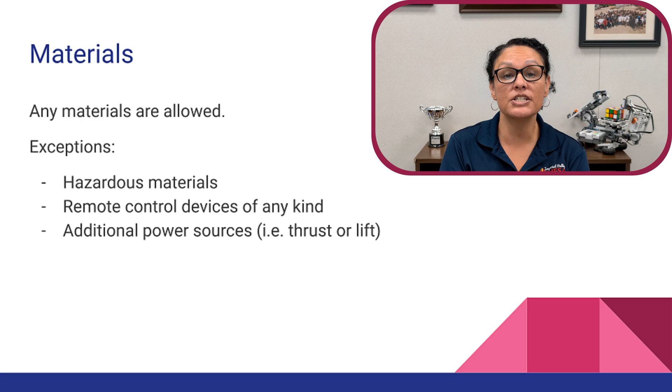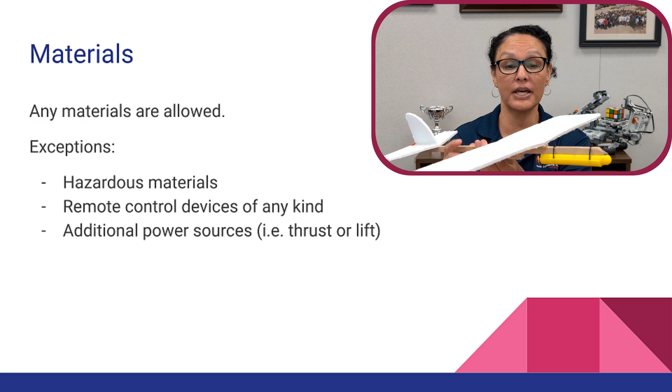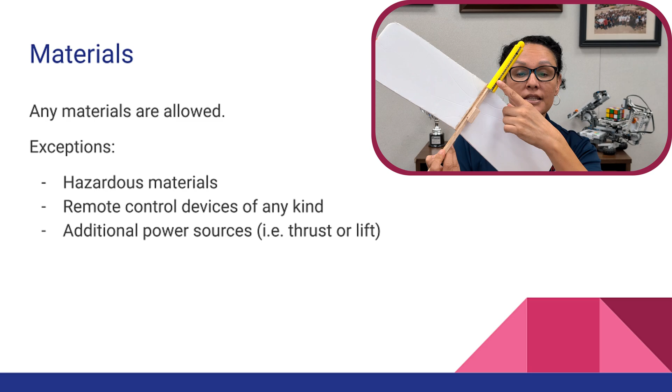As you will see in some of our videos that we will demonstrate, I'm going to show you some gliders that we have made here in office. As you can tell, this is balsa wood. We're also using poster board for the wings. In addition to that, you will see this glider specifically in the video. This yellow addition here was 3D printed to hold the hex nuts.

So do you have to use this? No, but it's a nice way for your students, especially those who have access to a 3D printer, to practice their design skills online and incorporate it into their gliders.

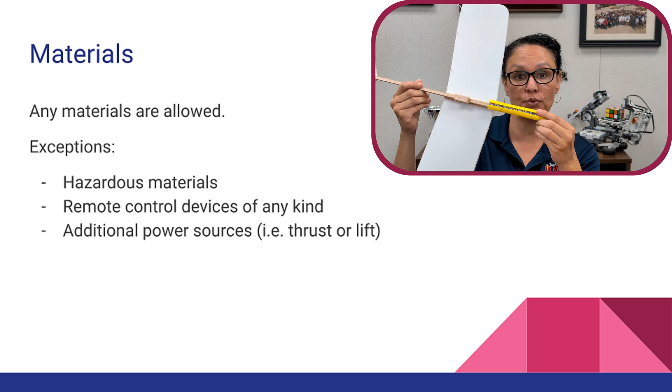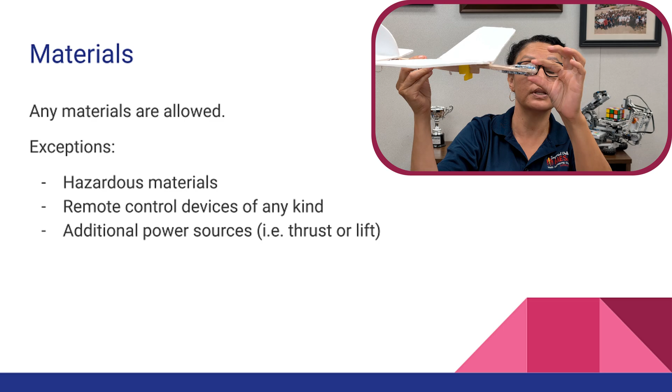We also have another glider here made out of balsa wood and poster board. This one, the hex nuts are attached by tape only.

Okay, for the obstacle, we did not change anything from previous years. It's the same distance, it's the same PVC pipe with the nylon string. And again, the glider must fly over the 5-foot obstacle and must stay within the 10-foot width of the obstacle as it's flying over it. So that remains the same as previous years.

The one thing we did change, a little tiny bit, but for the better always, is the launcher. As I have mentioned in prior trainings, we really listen to the feedback that we get from teachers, from staff, from students. And one of the things that they really touched on was that the launcher had no inclination.

So within our office, we have a real life STEM god, as we call him. His name is Minero, and he's always right behind me. Do you want to come say hi? Come say hi. Everybody has heard the name. Here's the man, the myth, and the legend, Minero.

He created this little, very simple attachment. It basically, as you can tell in the pictures, it just sits, it goes right into the bottom of the legs of the front of the table, and it gives it a 5-degree inclination. It is deep enough to where you don't have to add anything else. It literally, you put it on, it gives it an inclination, and this gives the launcher stability.

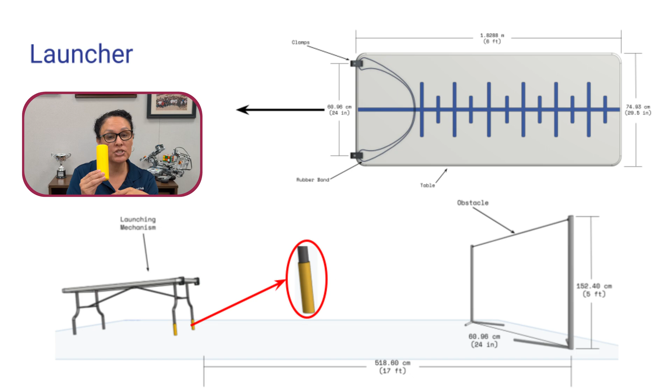This is available, and the link to print these is in the rules. We also know not everybody has a 3D printer, so you can email us - you'll have our information at the end of this presentation - and we can print a few of these out and send them to the school sites if you don't have a 3D printer within reach. This is required for this year's competition, so please make sure you have this at your competition.

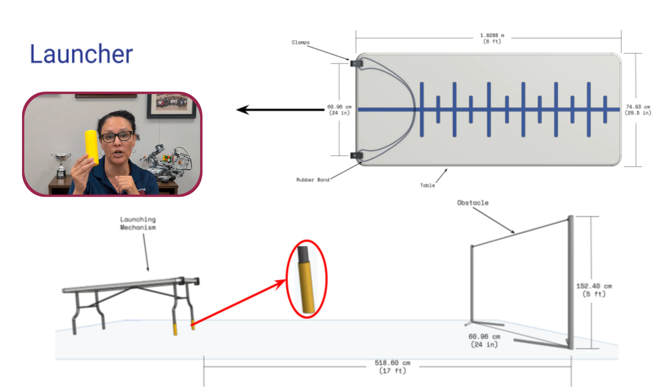Okay, moving on to the payload. As I touched on earlier, 6th, 7th, and 8th grade have a minimum of 2 hex nuts. The very specific kind we are purchasing has its link on the rules. We are asking that you purchase them from Home Depot. The sizes are listed there, and also on the link in the rules. We want everybody to purchase this exact hex nut so that it's standard throughout the state of California, and everybody is using the same hex nuts for the same weight and size. So minimum of 2 hex nuts for middle school, and minimum of 10 hex nuts for high school.

Each additional hex nut adds distance to your flight distance.

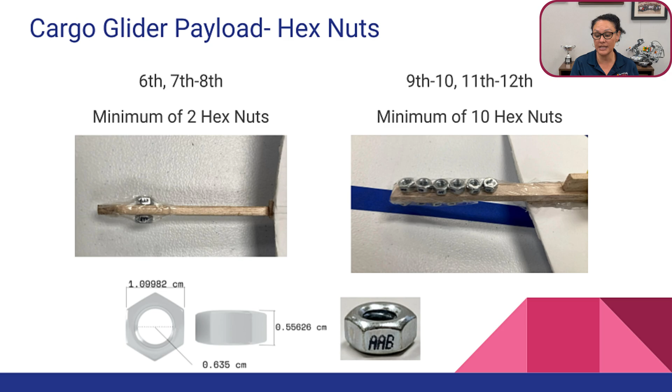In terms of how you attach them, I touched on creating something that holds them. Here you can see a simple picture with 2 hex nuts taped, and on the other side 10 hex nuts that are also taped. You can glue them on - almost anything is okay as long as we can see the AAB marking. When you check it in for Mesa Day inspection, we have to be able to see this marking to confirm it's the correct size, but otherwise any type of attachment is fine. As I showed earlier, this attachment made here in the office has an opening, and we can still see all the markings on those hex nuts.

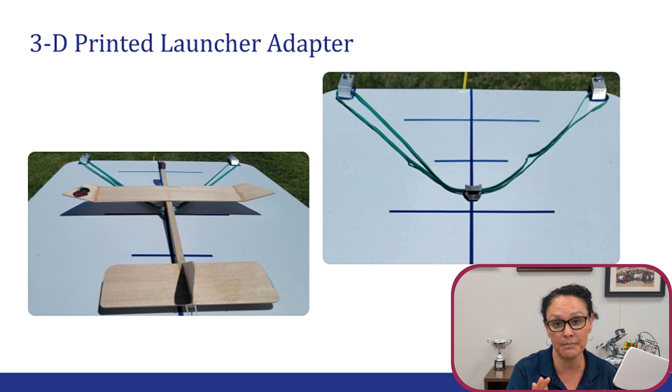We are continuing with the 3D printed launcher adapter. It is optional - you do not have to use it. If your student chooses not to use the 3D printed adapter, that's okay, it will still be available to you at Mesa Day. In our findings, when we practice with them, it just gives the glider a smoother launch and is easier to hook onto, but again it's not mandatory. Regardless, there needs to be something carved in or 3D printed on your glider that will hook onto either the rubber band or this 3D printed adapter.

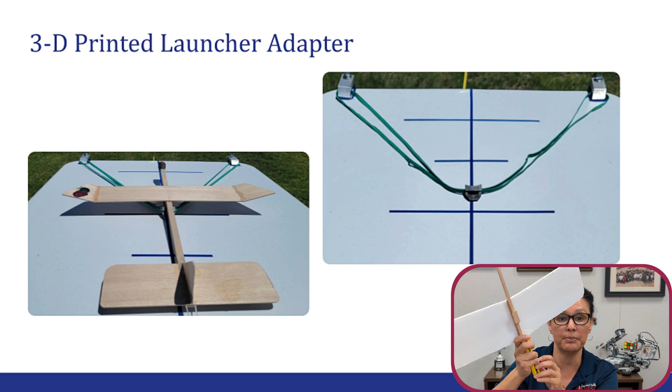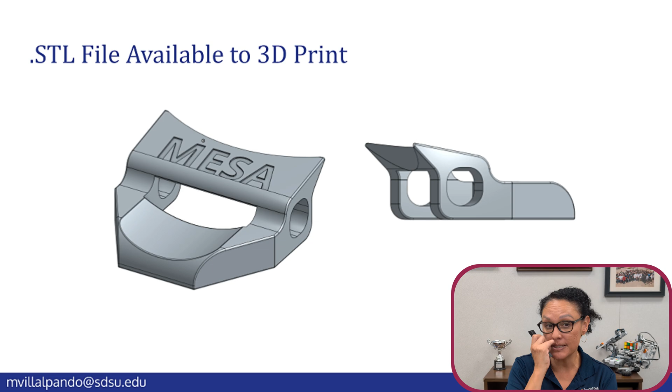This is the file, and it's in the rules for those of you who want your student to launch with this. The 3D print file is in the rules for the launcher adapter.

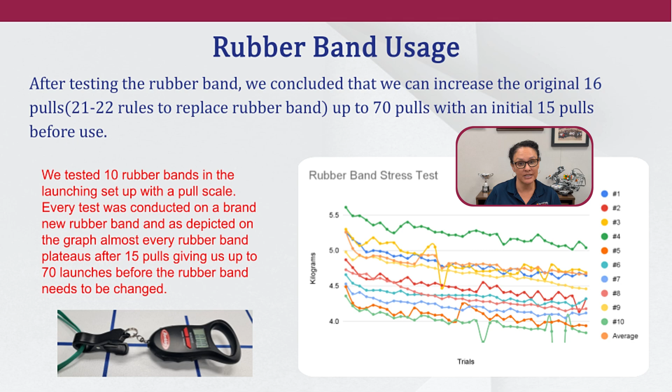We are using the same rubber band as in the past 3 years. It's very important that if you're using a brand new rubber band, you prime it first. That simply means pulling it a total of about 15 pulls, so that after the 15th pull, almost up to your 70th launch, there's a consistent launch because you've primed it to be ready.

Now, with all of that information, we are going to watch this year's new objective video. It will show you everything from launching to the setup for the launcher and the obstacle. It's just a few minutes long, so please enjoy, and we will be right back.

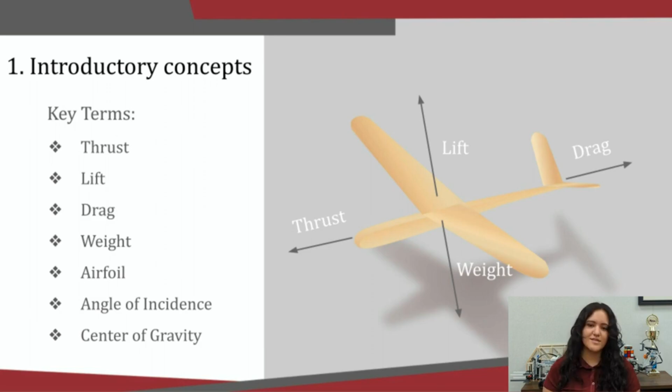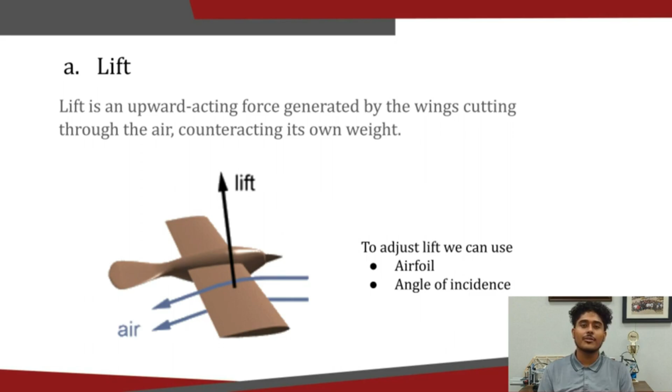Today we'll go over some few concepts and tips that will hopefully help you out with this competition. To build a glider, we first need to understand how it balances itself in the air. Some of the forces it's going to experience are thrust, drag, lift, and weight. These forces are shown in the image below. The most important force is lift, because it counteracts the weight of the glider and keeps it in the air. A way to manipulate it would be with the airfoil or the angle of incidence.

When we talk about airfoil, we refer to the shape and arc given to the wings of a glider. By adjusting the arc, we can create more lift. However, it's important to consider that when we create an aggressive arc, we are also creating drag. In the following diagrams, we will show you different variations of airfoils.

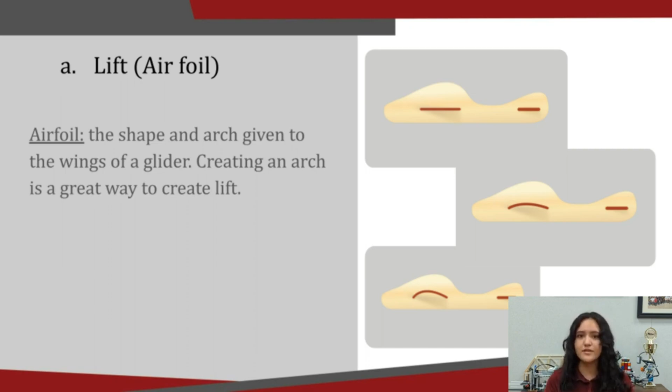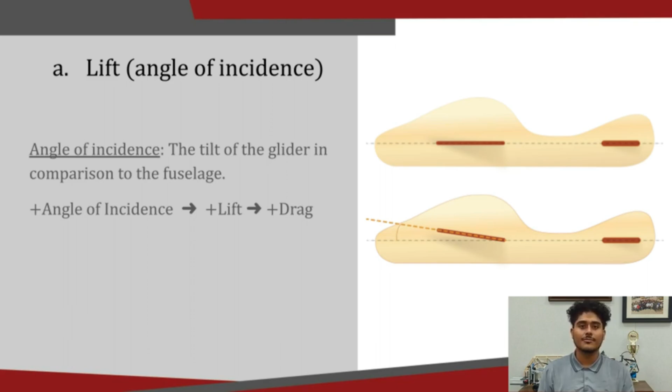Needless to say, moderation is crucial, especially when we talk about the angle of incidence. The angle of incidence is the inclination of the wings in relation to the fuselage. The center of gravity is ideally placed at the center of the wing. This is important because it helps reduce torque forces in any direction, which cause the glider to flip.

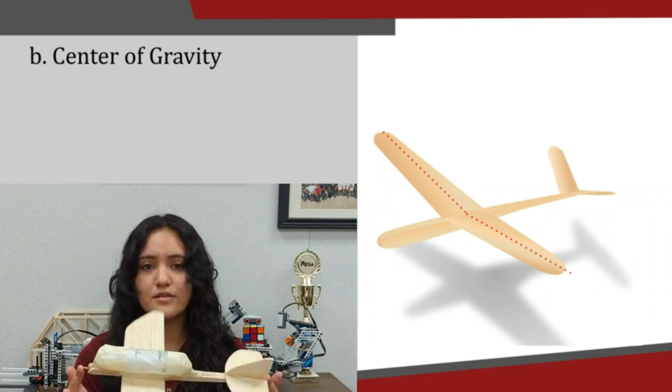To ensure that our glider is balanced, we will have to do the finger test. We will place our finger on the center of the wings and check for balance. If it tilts a certain way, we would put weight on the opposite side until it is balanced. In our case, we'll be using clay, and it is preferably placed at the tip of the fuselage.

Although drag is an opposing force, it ensures that you have a stable flight. To be more specific, you will achieve a straight path. When you locate most of your drag on the back of your glider, it ensures that your tail follows your nose. Now, let's not forget that too much drag will shorten your flight distance.

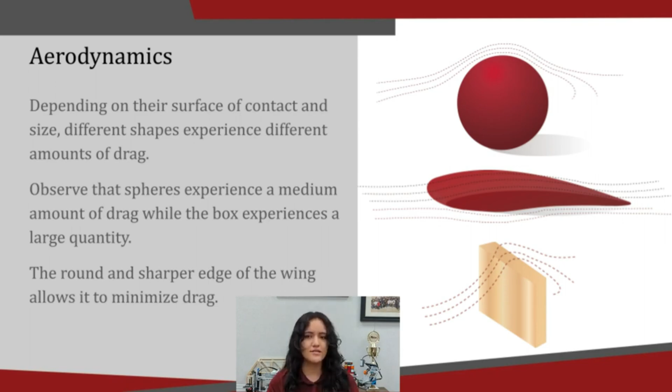For any object in the air, any square or sharp edges are usually not your friends. Rounding your edges will help you achieve a smoother flight. Some tips to make your glider more aerodynamic would be to round your edges like so.

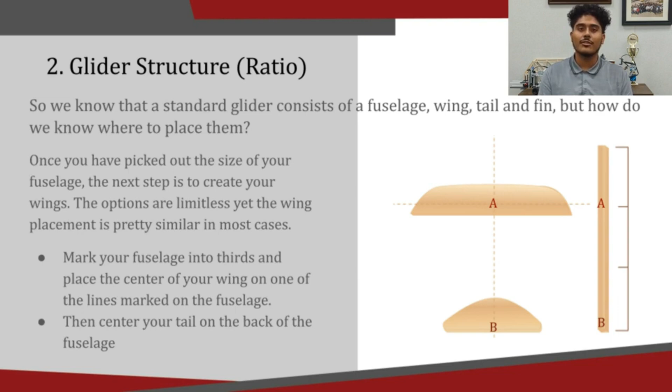Typically, we want the fuselage and wings to be the same length and our tail wing to be half that length. Then we would place the wings at the 1/3 mark on the fuselage and the tail wings towards the rear of the fuselage. Then, in order to attain symmetry, we can use an imaginary line going through the fuselage and make sure both sides are mirrored throughout. This ensures that the forces are proportional.

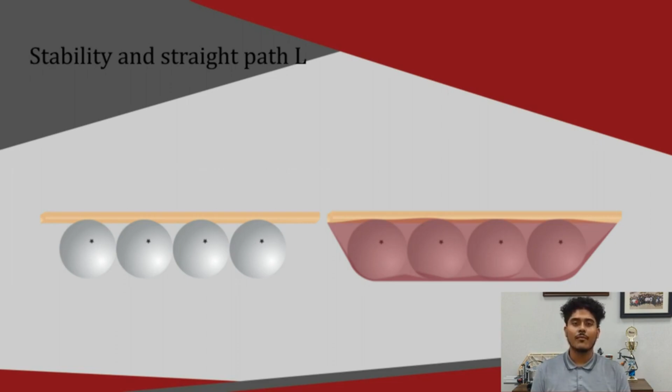For a more stable flight, try to place your load at the bottom of the glider, as it will prevent wobbling, fighting the urge to flip over. The balls also come with some surface area which create drag. This drag is inevitable, but we can use it to our advantage by placing it far from the nose. Another way to decrease drag caused by the load is to line them up in a way to reduce cross-sectional area. Another way is to wrap the balls in a way that helps it cut through the air. There are a few other ways to improve stability in our glider, and here are some examples.

We want to emphasize that before you launch, it is important that you have a good center of mass and a symmetrical glider. This is crucial because you want a predictable flight to be able to diagnose any problem you may confront, and also avoid any unnecessary crashes.

Now that we have a symmetrical glider and a good center of mass, we can start launching. One of the first problems you're going to encounter is when your glider tips like this or does a backflip. To counter this, we can add more weight on the front or create more lift on the tail. It's also important that your airfoil or angle of incidence isn't too aggressive.